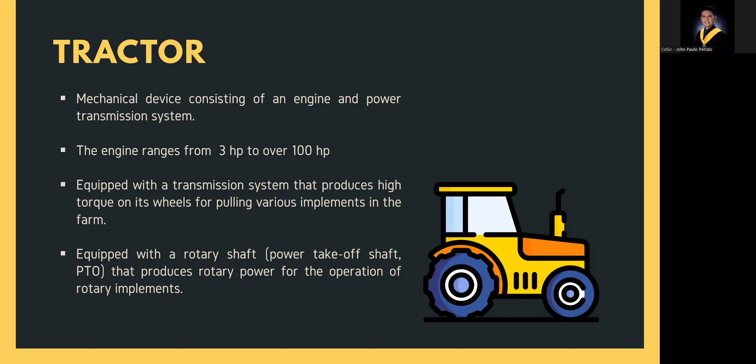It is equipped with a rotary shaft, its power take-off shaft or PTO, to produce rotary power for the operation of various rotary implements. It is also equipped with a hydraulic system for lifting and lowering during transport and positioning during operation of various implements.

Again, a tractor is defined as a self-propelled machine that has drawbar power for producing power on the wheels, rotary power on its rotating axles and shaft, and lifting power on its hydraulic system. So that is our tractor.

Tractors are classified as two-wheel tractor and four-wheel tractor. We have a two-wheel tractor and a four-wheel tractor. This is the two-wheel tractor, and this is the four-wheel tractor.

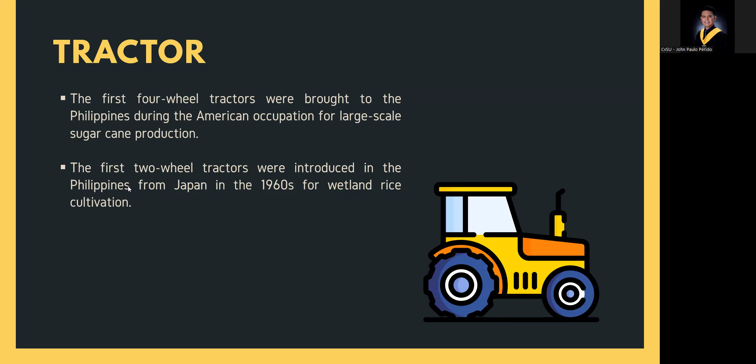So what are the basic parts of our tractor? We have the engine that supplies the power, transmission which transmits the power to the drawbar, power take-off shaft, belt pulley, and power lift. It is also a means of regulating speed. Then we have the differential, which delivers power to the transmission and to the traction wheel, and last, the clutch, which connects the crankshaft to the transmission.

Again, the clutch connects and disconnects the crankshaft, or rather the flywheel, to the transmission.

Next, types of tractor according to type of construction, and type of drive. First we have the first type and the second type according to type of construction.

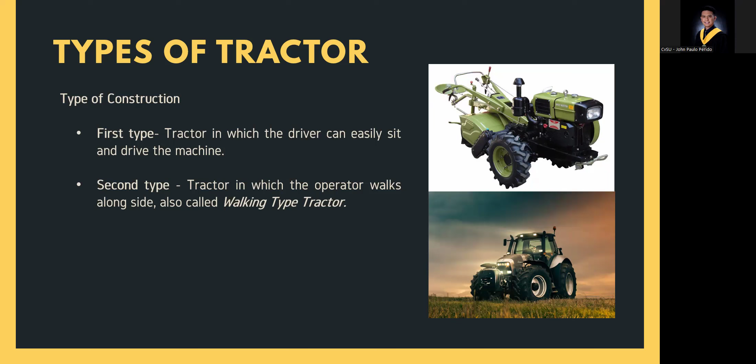The second type is a tractor in which the operator walks alongside or walks behind the tractor, or the walking type tractor. That's the one above. So this is the two-wheel tractor, also known as walking type tractor and hand tractor.

It is a single axle machine powered by an engine ranging from 3 horsepower to 15 horsepower. Where is it used? Mostly for land preparation, planting, cultivating, harvesting, and transport. Various implements are attached to this tractor and the operator walks behind to provide control.

We can also classify it according to function. We have the traction type, which provides pulling power to its drawbar; rotary type, fitted with rotary blades to cut and pulverize soil; and general purpose type, fitted with drawbar for traction work and power takeoff for rotary work.

Again, the traction type has pneumatic wheels and a drawbar for pulling. The rotary type, instead of pneumatic wheels, has rotary blades to cut and pulverize soil. And the general purpose type has pneumatic wheels for pulling and a drawbar also for pulling, plus a power take-off shaft that we can attach rotary implements to.

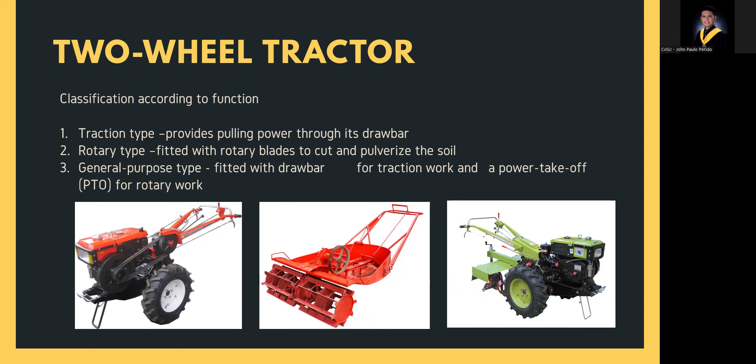The four-wheel tractor is a class of slow-moving vehicle, up to 30 kilometers per hour, with high torque on the driving wheels. It comes with multiple speed transmission, including reverse, to accommodate various field speeds.

The operator is provided with a seat from where the tractor is controlled, with various controls such as throttle lever, clutch pedal, brake pedals, gear shift lever, steering wheel, hydraulic main control lever, PTO control lever, differential lock pedals, and others. Four-wheel tractors are commonly used in land preparation, planting, weeding, cultivating, crop care, harvesting, and transport.

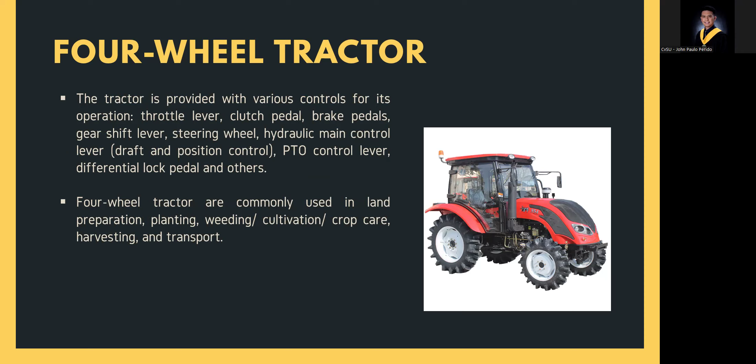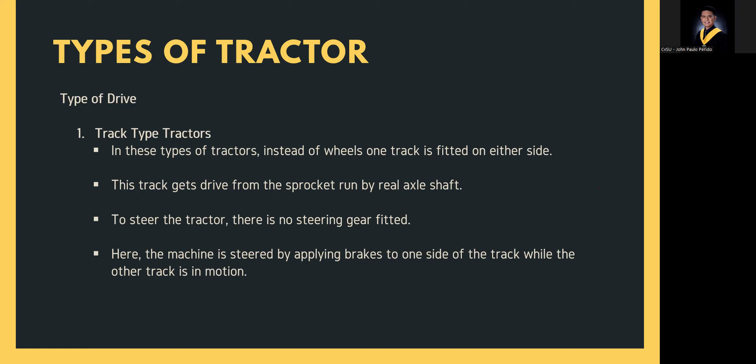Under track type, we have full track type and half track type. When we say full track type, both axles of the tractor are fitted with track chain. Sorry, that's actually half track type. For half track type, typically the rear end has track chain, and the front has pneumatic wheels. For full track type, both rear and front axle are fitted with track chain.

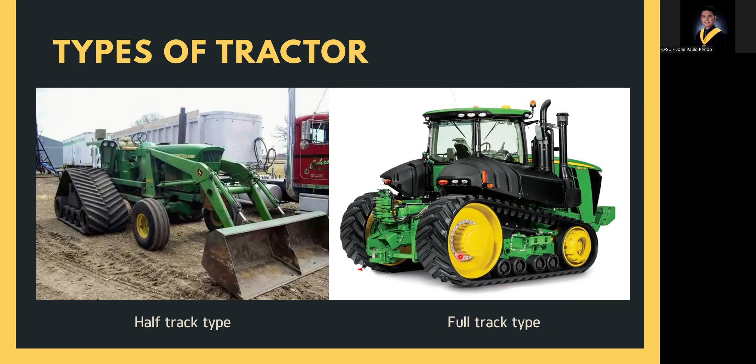We also have wheel type tractors, fitted with pneumatic wheels. And we have what's called two-wheel drive and four-wheel drive.

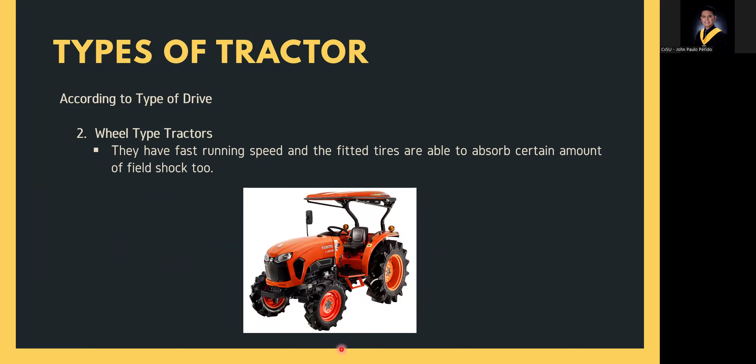Now, types of tractor according to the purpose for which the usage is done. First, utility tractor - a general purpose machine for plowing and driving other equipment through its drive. It's considered good for farms where farmers cannot afford more machines to perform a specific job.

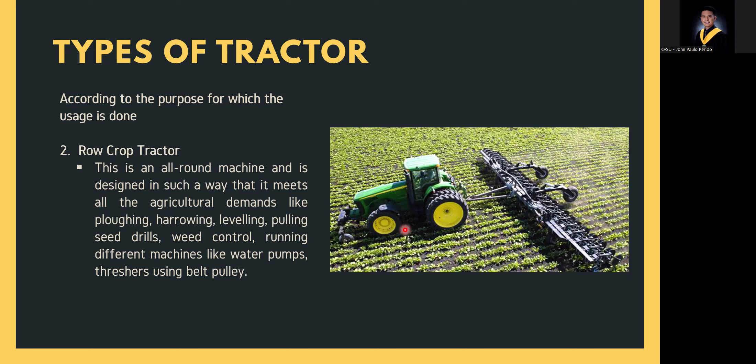Orchard type - this tractor is somewhat taller so the driver can easily pluck the fruits and the trees can be easily trimmed. It's quite tall, almost as tall as the trees.

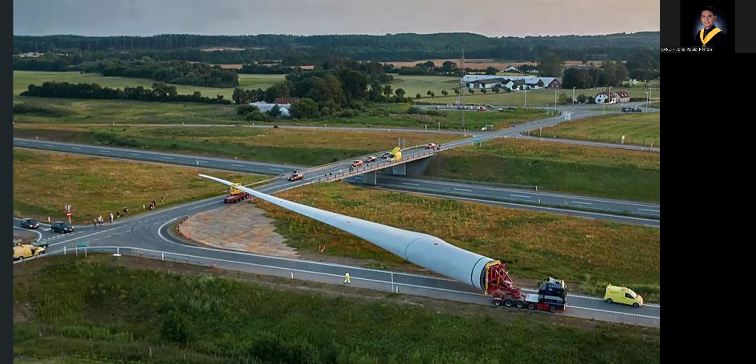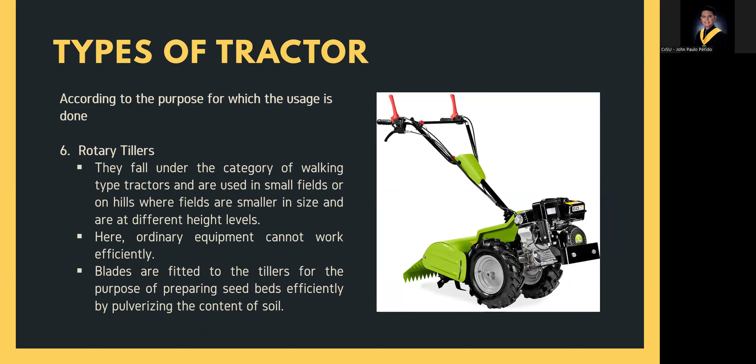Next, rotary tiller. So, under to ng mga walking type tractors and fitted to with rotary blades, pangbungkal ng lupa. Nandito yung kanyang rotary blades.

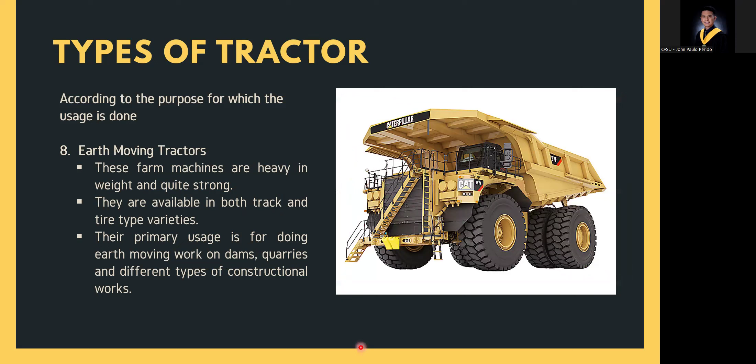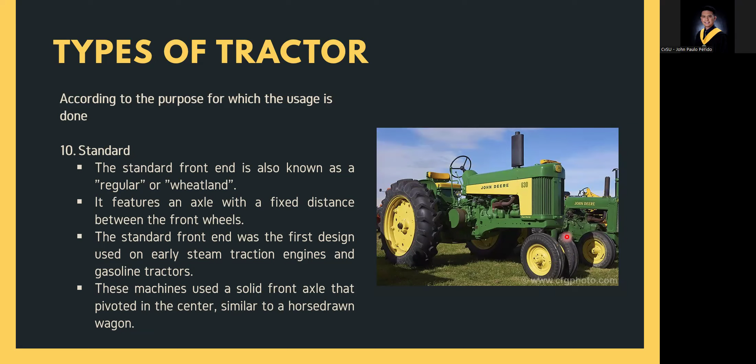Next, mga accessories naman tayo ng tractor. Una is ballast, a substance that is added to the tractor for the purpose of improving traction and stability. Para mas makapit yung tractor sa lupa and para mas stable siya, hindi siya mag-roll over.

Next is chain wheel, used to increase the traction din to. Ilalagay natin dun sa gulong. Hindi lang naman ginagamit yung chain wheel sa tractor, sa ibang bansa na maraming snow, gumagamit din ng chain wheel para to add traction at hindi ganun madulas yung kanilang mga sasakyan.

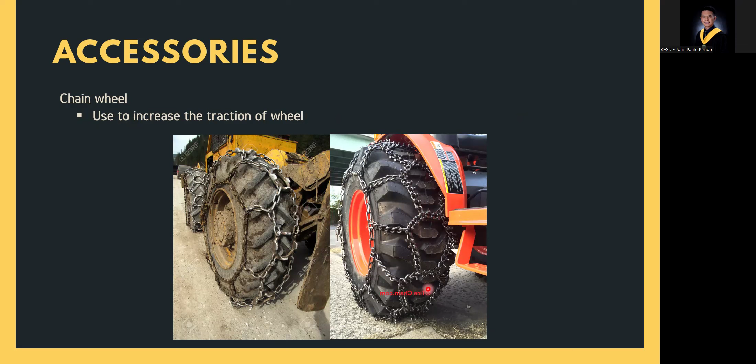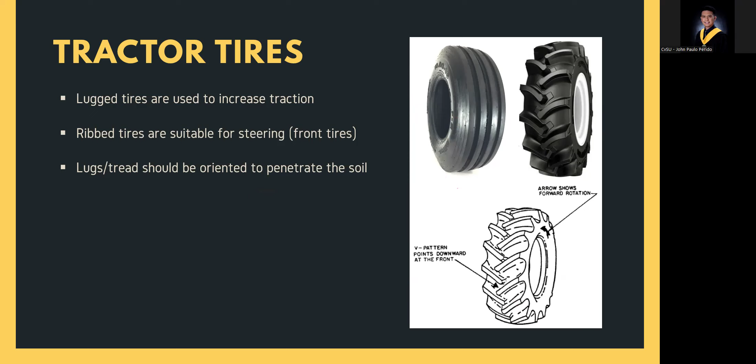Lugs/tread should be oriented to penetrate the soil. Next is dual tire, dalawahan yung gulong sa harapan, sa isang side ng axle.

Anong ginagawa nito? Dahil mas maraming gulong, mas maraming contact area dun sa soil and may permit the use of additional ballast pa. Since dumami yung gulong, mas marami yung contact area, mas na-distribute yung weight ng tractor which improves flotation sa tractor para hindi siya masyadong lumubog sa mga malalambot na lupa. Kaya lang, nag-i-increase to ng stress on tractor axle, bearing, and the entire drivetrain.

So next, transmission system naman tayo. So basic components of two-wheel tractor, we have the prime mover. So ito yung engine, power transmission system. So ito yung nagdi-deliver ng power from the engine to its wheel. Mounting frame kung saan nakalagay yung iba't ibang parts ng tractor. Differential control lever, different control levers, and wheel.

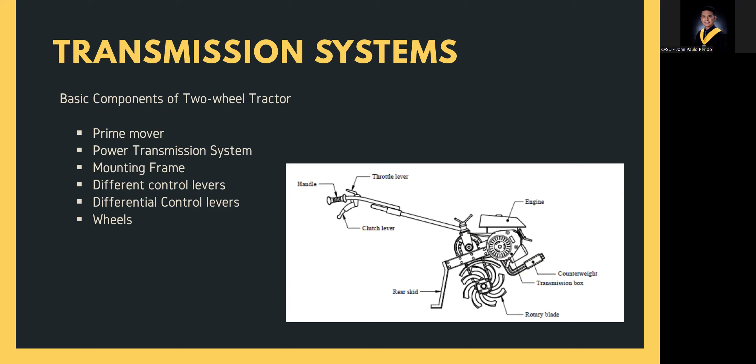So, common methods of power transmission for two-wheel tractor. So, una is belt and pulley. So, transmission efficiency ng belt ay less than 100% because some slippage between belt and pulley happen. So, transmission efficiency is a function of belt tightness, diameter, class of pulley, type of belt, and magnitude of power being transmitted. So, ito makikita natin sa taas. Ito ay V-belt and V-pulley or V-belt and sheave. Tapos ito naman, flat belt pulley and flat belt.

Okay? So, the direction of rotation of two pulleys are the same. Okay? So, kung yung driver pulley is counterclockwise and then yung driven pulley, counterclockwise din. So, clutch action may be obtained by shifting the belt from a loose to a tight connection using third pulley or other techniques.

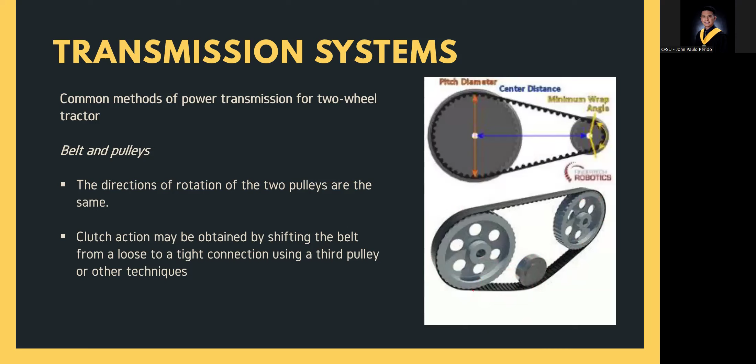So speed ratio between the engine and the load depend on the diameter of two pulleys as shown in the equation. So ito yung ating formula. N1 D1 is equal to N2 D2, where N1 is the RPM of the smaller pulley, N2 is the RPM of the larger pulley, D1 is the diameter of the smaller pulley, and D2 is the diameter of the larger pulley. Next, for the belt length naman, so this is from PAES.

So, L is equal to 2C plus pi over 2 times DL plus DS plus the quantity DL minus DS quantity squared all over 4C. So, where L is the length of the belt in mm, C is center to center distance ng mga pulley, D sub L is yung diameter ng larger pulley, and D sub S is diameter of the smaller pulley.

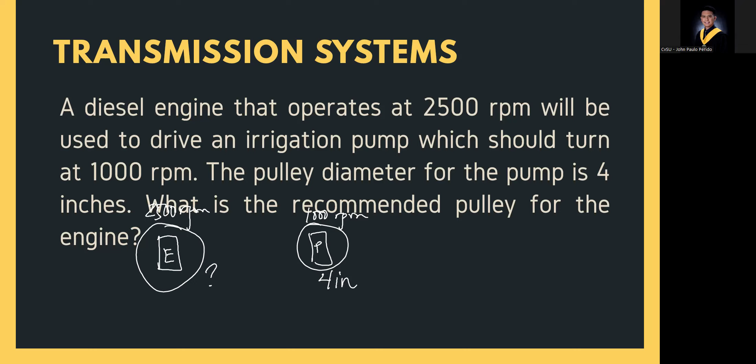So, sabi doon sa equation natin, N1 D1 is equal to N2 D2. Okay? So, N1 is speed, so 2500 RPM. Diameter 1 is missing, and N2 naman is yung speed ng mas maliit nating pulley times diameter, 4 inches.

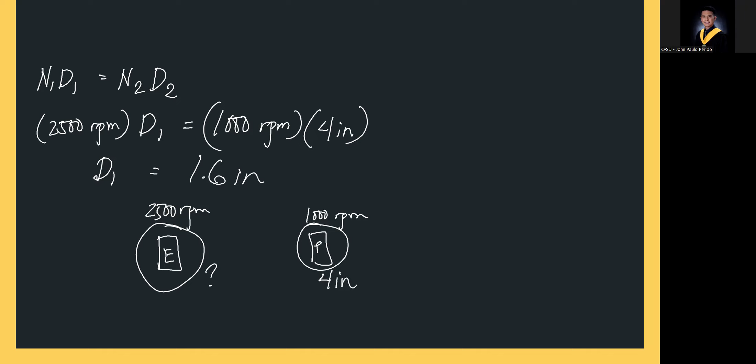So, pag kinompute natin yung D1, so ang sagot dito is 1.6 inches. So, mas maliit yung pulley ni engine kaysa kay pump. Okay? So, maliit na pulley, papuntang palaking pulley. So, magdi-decrease yung speed. Okay?

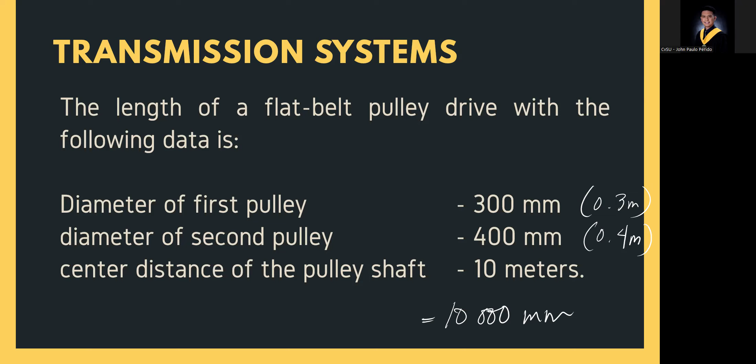Okay. So, next, length of flat belt naman ang pinapahanap with the following data. So, the diameter of the first pulley is 300 mm. Diameter of the second pulley is 400 mm. And the center-to-center distance of the pulley shaft is 10 meters. So, times 1,000, magiging 10,000 mm. Okay? Or, pwede rin naman natin itong gawing 0.3 meters. Ito naman, 0.4 meters. So, kahit alin dyan yung gamitin natin.

Okay? So, sabi, L is equal to 2C plus pi over 2, D na malaki plus D na maliit, plus D na malaki minus D na maliit squared over 4C. Okay? So, L is equal to 2 times, gawin na lang natin meters, 10 meters plus pi over 2. Ang D na malaki natin is 0.4. Plus pala to. So, plus 0.3 meters.

Naka-meters pala to. 0.4 meter plus 0.3 meter plus 0.4 meter minus 0.3 meter squared over 4 times 10 meters. Okay? So, pag kinumpute natin ang L dyan, magiging sagot natin is 21.09980743 meters. So, yan yung length ng flat belt na kailangan natin. Okay?

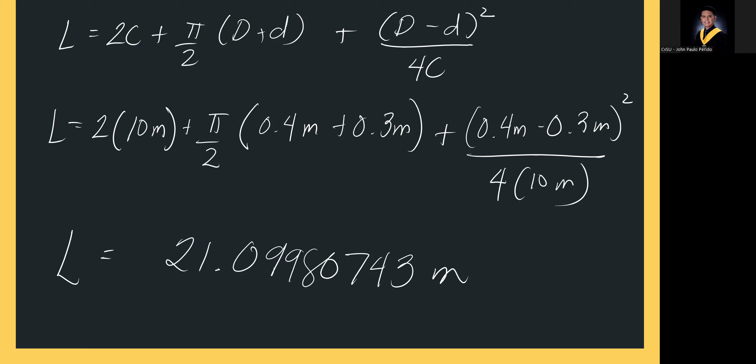Next. So, another transmission system is chain and sprocket. So, less than 100% din ang efficiency nito because of chain slack. So, ang direction nito is the same. Okay? So, kung clockwise yung isang sprocket, clockwise din yung isang sprocket. So, common example of using chain and sprockets are the transmission of bicycles and motors.

So, yung speed ratio between the engine and load depends upon the number of teeth ratio of the two sprockets. So, ito yung equation nila. N1T1 is equal to N2T2. So, similar lang to sa equation kanina na N1D1 is equal to N2D2. Kaya lang, sa halip na diameter, number of teeth nung sprocket naman yung kailangan natin.

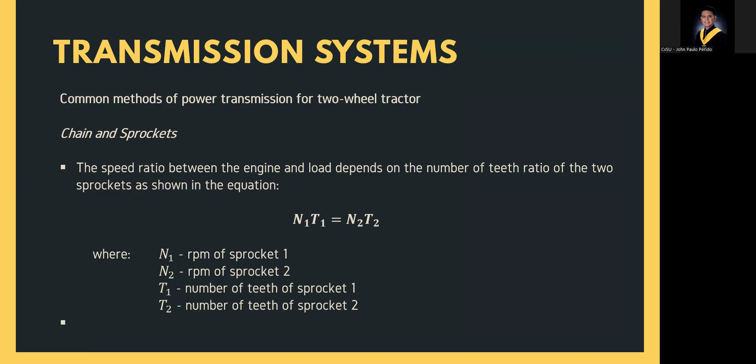And then, ito naman yung length of chain. L is equal to 2C plus (T sub L plus T sub S) over 2 plus (T sub L minus T sub S) squared over 4 pi squared C. Wherein T sub L is the number of teeth of large sprocket and T sub S number of teeth of small sprocket. C naman is center distance between shaft in pitches. And then, length of chain is in pitches. So, speed ratio of chain is driver over driven sprocket. So, para makuha natin ang speed ratio.

So, a chain and sprocket drive is designed to drive a horizontal mixer at a speed of 100 RPM. The power source from a smaller sprocket has a speed of 400 RPM. So what is the size of the smallest sprocket needed if the large sprocket has a teeth of 45 T? Also compute for the speed ratio of the drive and the length of the chain if the center distance between shaft is 48 inches. Assume a chain pitch of 0.5 inch per pitch. Okay, sagutan natin yan.

So, unahin muna natin yung number of teeth. So, tingnan natin sino magka-partner dito. So, chain and sprocket daw ginamit to drive a horizontal mixer. So, si mixer, 100 ang RPM niya. Yung power source, 400 RPM. And what is the size if the large sprocket has a teeth of 45 T. So, si 400 RPM, smaller sprocket siya. Ibig sabihin ang magka-partner is itong 45 tsaka itong 100. Okay? So, kumpyutin na natin yan.

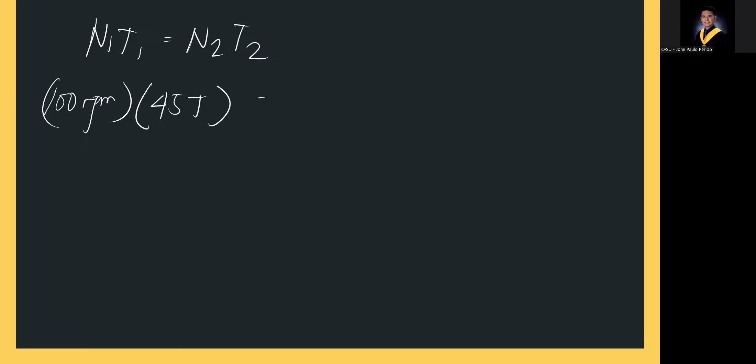So, sabi, N1 T1 is equal to N2 T2. So, ang speed N1 is 100 RPM. Ang number of teeth naman niya is 45 T. Sa N2 naman, ang speed niya is 400 RPM, pero hindi natin alam kung ilan yung number of teeth niya. So, pag kinuha natin ang number of teeth nito, ang lalabas ay 11.25 T or 11.25 teeth.

So, the problem is wala tayong 0.25 teeth. So, hindi pwedeng bungi. Okay? So, either magiging sagot natin is 11T or 12T. Kaya lang, isa lang pipiliin natin. So, i-check natin if 11T ang gamitin natin at 12T. So, let's say N1 yung missing, times 45T, equals 400 times 11T, tapos another is N1 times 45T is equal to 400 times 12T. So, tingnan natin ano yung magiging value ni N1 if ginamit natin itong dalawang to.

So, 400 times 11 divided by 45, ang lalabas ay 97.77 RPM. Okay? Pagka naman 12, 400 times 12 divided by 45, ang lalabas ay 106.67 RPM. So, ang gagamitin natin dyan is 12T. Bakit si 12T? Kasi lampas siya ng 100 RPM. Need kasi natin ma-provide yung 100 RPM. Kung mag-11T tayo, hindi natin mapoprovide yung 100 RPM, 97 lang. So, much better if 12T yung gamitin natin para ma-provide pa rin natin.

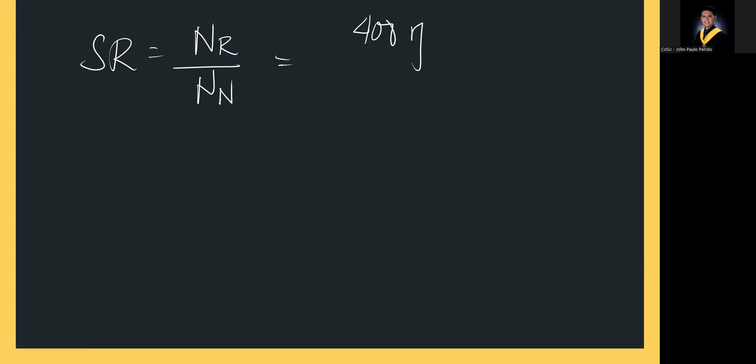So, used to drive a horizontal mixer. So, ibig sabihin, sa horizontal mixer yung dinadrive, 100 yung RPM niya. Okay? And then, siya yung driven gear. Siya yung dinadrive eh. So, ito yung driven gear. At ang driver naman natin ay etong 400 RPM. So, driver is 400, driven naman is yung 100. So, ito R para driver, ito driven naman. Para matandaan natin, R tsaka N.

Dulo ng driver na word. So, driver, ito yon. Driven naman to. Para hindi tayo malito. Palatandaan yan. So, 400 over 100 RPM. So, magiging sagot natin dito is 4 is to 1. So, bakit may is to 1? Kasi speed ratio. Okay? Next naman is length of chain.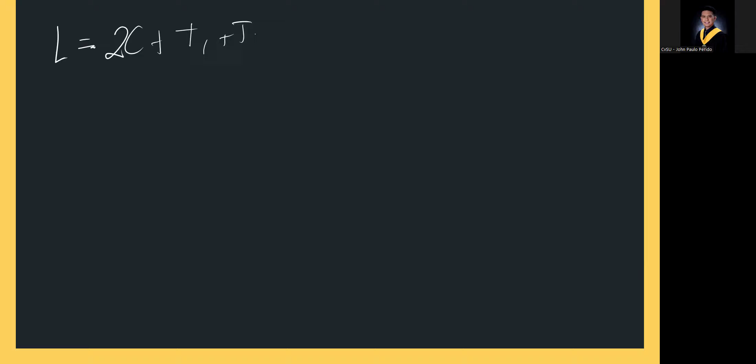Center distance is 48 inches, 0.5 inch per pitch. So, sabi sa equation kanina, L is equal to 2C plus TL plus TS all over 2 plus (TL minus TS) squared over 4 pi squared C. And C is in pitches. Okay? So, L is equal to 2 times 48 inch times 1 pitch per 0.5 inch. Okay?

Plus 45T plus 12T over 2. So, ito yung mga nakuha nating value, plus 45T minus 12T squared over 4 pi squared times 48 inch times 1 pitch per 0.5 inch. So, solving for L, ang makukuha natin is 220.5087073 pitches. Okay? And pwede natin to i-convert into inches.

So, 220.5087073 pitches times 0.5 inch per pitch. So, makuha nating answer dito is 110.2543536 inch. Okay?

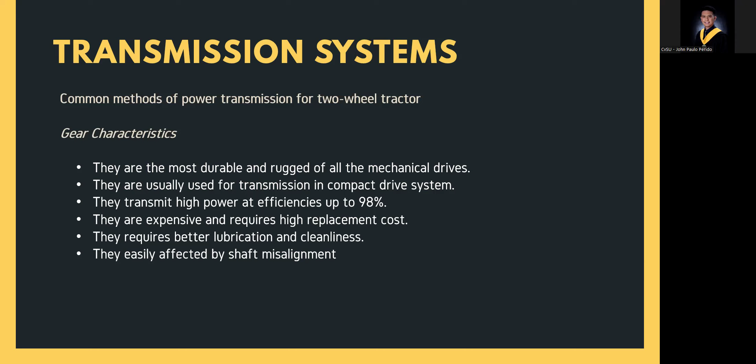So, transmission efficiency is less than 100% because of gear slack. And yung center distance between shaft of the engine and load is dictated by the size of the gear. So, okay lang dito na maliliit yung center to center distance. So, ano ba yung characteristic ng gear? Durable and rugged for all mechanical drives. They are usually used for transmission in compact drive system. Up to 98% ang efficiency niya. Expensive and requires high replacement cost. Requires better lubrication and cleanliness, and easily affected by shaft misalignment.

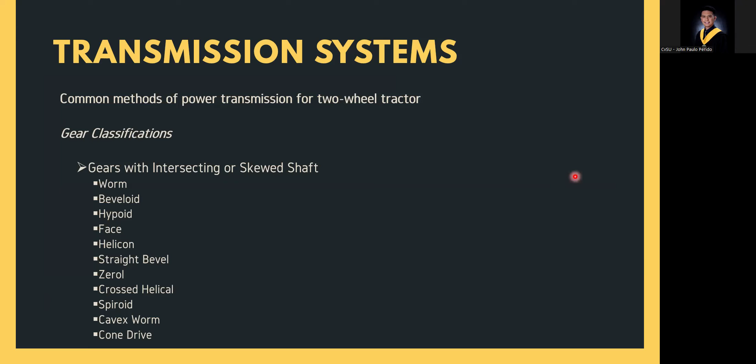So, yung mga gears with intersecting or skewed shaft naman, we have the worm, beveled, beveloid, hypoid, face, helicon, straight bevel, zerol, crossed helical, spiroid, cavex worm, and cone drive. So, ito yung straight bevel gear. 90 degrees yung angle nung mga axis nung kanilang shafting. Ito naman, worm gear naman to. Hindi intersecting yung shaft niya, pero pwede na natin sabihin intersecting yung shaft niya at some point.

So, spur gear. Tingnan natin yung ilang mga gears lang. Spur gear, most common type ng gear to. Teeth are straight and parallel to shaft axis. Simple lang to, low cost, and easy to maintain. Drawbacks lang nito, less capacity and noisier than other types of gear. So, helical gear, para pa rin siyang spur gear, pero yung mga ngipin niya ay tabingi na. It can carry more load than the equivalent size of spur gear. Mas smooth yung operation and mas quiet. Kaya lang medyo costly siya as compared to spur gear. And kapag double helical gear, we call it a herringbone. So, ito yung herringbone natin.

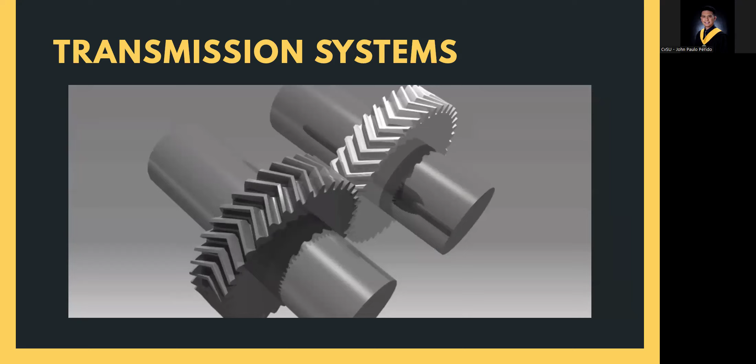So, straight bevel gear naman, simplest type ng gears with intersecting shaft. It is commonly used for shafts intersecting at right angle but can also be used for shafts mating at any angle. So, pag sinabi natin straight bevel gear, 90 degrees. Pero pagka bevel gear lang, pwedeng hindi 90 degrees yung shafting. Gears are designed in pairs that are not always interchangeable. Supporting shaft and bearings must be rigid to maintain proper tooth contact.

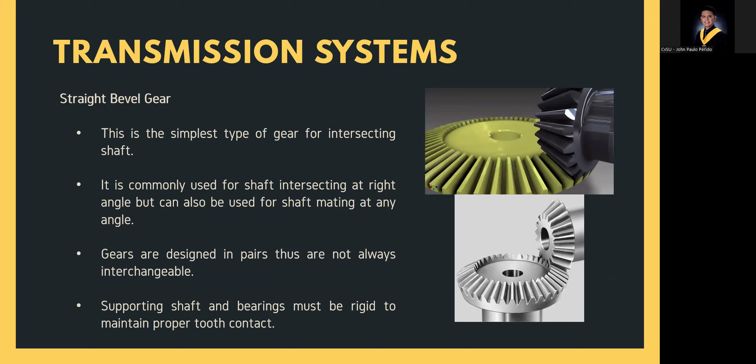Okay, next. So we have here a rack and pinion gear. So from rotational to linear naman yung motion nito. And then, ito naman yun kapag gumamit tayo ng idler gear. So tingnan natin. So pag kasi gear, opposite yung direction. So balikan natin yung mga nakarang gear.

So tingnan natin to. So si red ay let's say this is clockwise. Si blue naman counterclockwise. So tingnan natin dito. Etong mas malaki, clockwise. Yung mas maliit, counterclockwise. So, ganyan kapag ang direction, kapag ka-gears. Pero pag nilagyan natin ng third gear or the idler gear, si A tsaka si C, same na yung direction niya. While si B naman is opposite ni A at opposite din naman siya ni C.

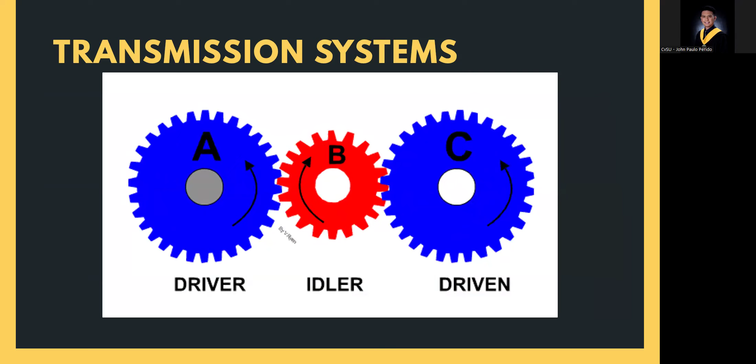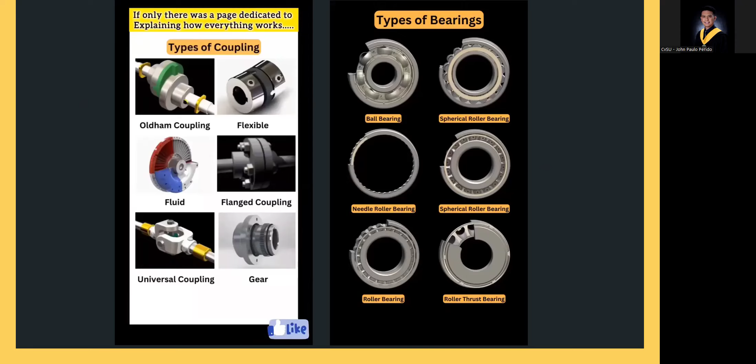So, next naman, ito naman mga to ay mga couplings. So, kung mababasa nyo yung ENGMAT, which is, I think, i-quiz din naman natin yan. Hindi po pala. So, hindi pala natin i-quiz yung PAES ng ENGMAT. So, kung mababasa yung ENGMAT sa mga journals, coupling. So, we have the Oldham, flexible, fluid, flange coupling, universal coupling, and gear. And then we have the types of bearings here. So, mga ball bearing, spherical roller bearing, needle bearing, spherical roller bearing again, roller bearing, and roller thrust bearing.

So, try natin mag-compute. So, a gear rotating at 800 RPM, it is being driven by another gear at 400. What is the speed ratio of the drive? And what is the gear ratio? So, hindi natin alam ang speed ratio. Kasi ang speed ratio is for... okay. So, speed ratio, same pala siya. Gear ratio ang hindi natin alam, no? Ang walang formula. So, speed ratio is equal to driver over driven.

Okay? So, from here, gear rotating at 800. So, it is being driven by another gear at 400. Ibig sabihin, ito yung driver, ito yung driven. So, kung kumpitin natin speed ratio, ang driver natin is 400 at ang driven natin is 800 RPM. Pag kinumpute natin yan, 0.5:1. So, yan yung speed ratio.

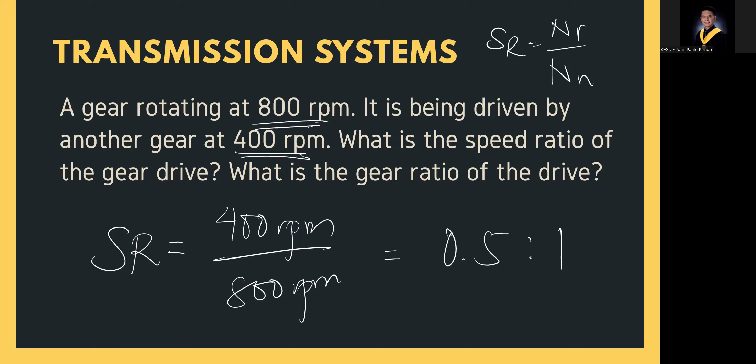Pag sinabi naman natin gear ratio, so number of teeth of the driven gear and number of teeth of the driver gear. Okay? So, kaya lang, ang problema, hindi sinabi sa problem kung gaano kadaming teeth. Okay? So, but we can assume naman, since naka-ratio to, no? So, gamitin natin N1T1 is equal to N2T2.

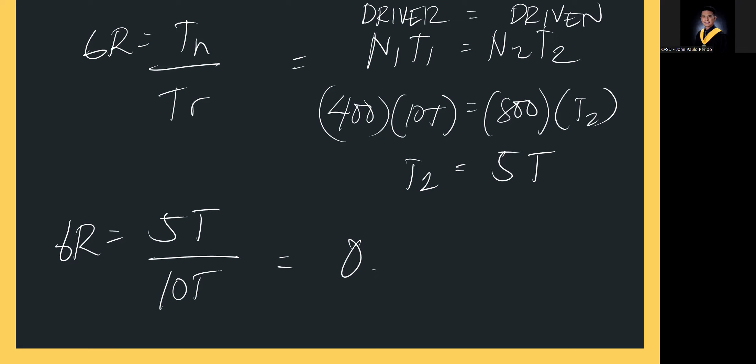So, kung si N1 ay sabihin natin itong 400, sabihin natin 10 lang yung teeth nito, si N2 ay 800. So, ilan kaya ang teeth nito? Okay? So, pag kinumpute natin, so 5T lang. Okay? So, sino ba dito si driver? So, dito sabi kanina, ang driver is si 400. Ito si driver. Ito naman si driven. Okay? So, from the gear ratio, so we have number of teeth of the driven, which is 5, over number of teeth of the driver, which is 10. So, ang lalabas sa atin ay 0.5:1 pa rin. Okay?

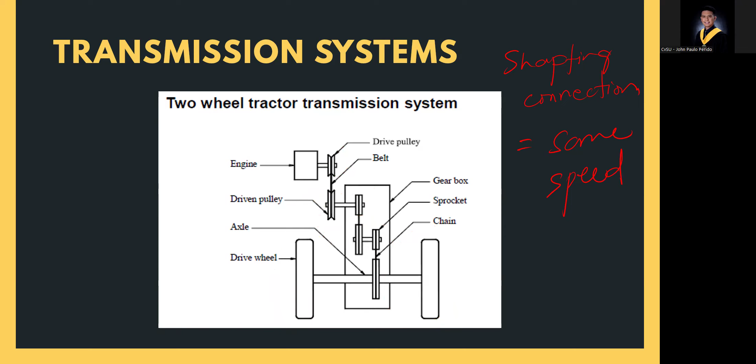Okay, so the transmission system is the second major component of the tractor, sa four-wheel. The engine being the first major component. So again, the transmission system provides drawbar power through the wheels, rotary power through rotary axles and shaft, and lifting power sa mga hydraulic system. So, drawbar power sa mga wheels, PTO shaft, so rotary power, and hydraulic power sa mga hydraulic system.

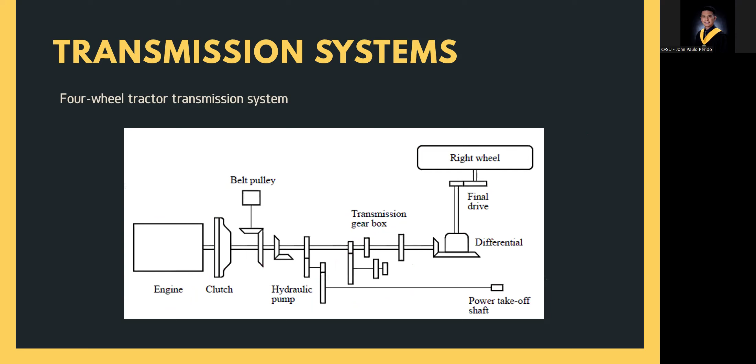Okay? So, kung natatandaan yung powertrain dun sa discussion natin sa engine, ito din yan. So, clutch, which connects and disconnects the engine flywheel. And then, naka-belt and pulley siya. May pump to the hydraulic system. And then, power PTO. And then, also the transmission gearbox. And then, from that, papuntang differential. And then, differential, papuntang left and right axle ng rear wheel niya.

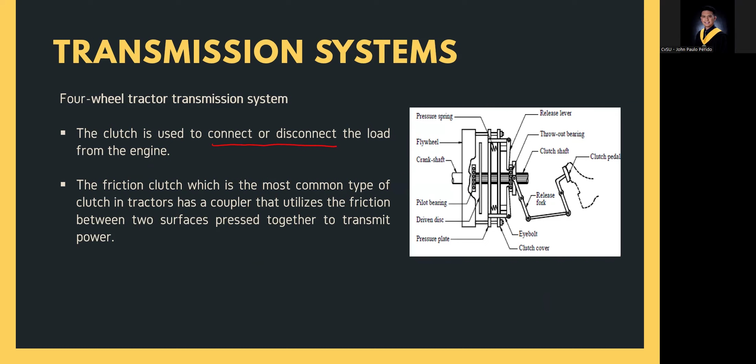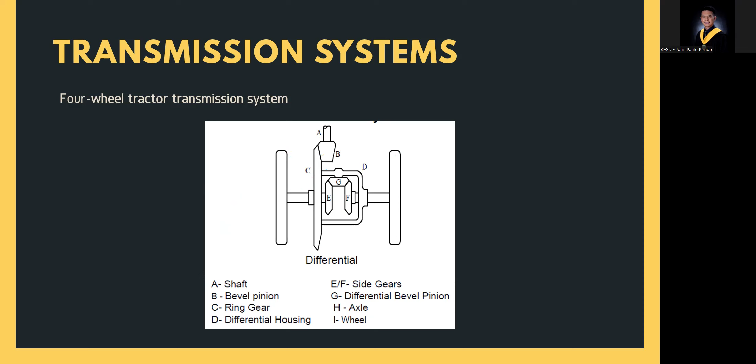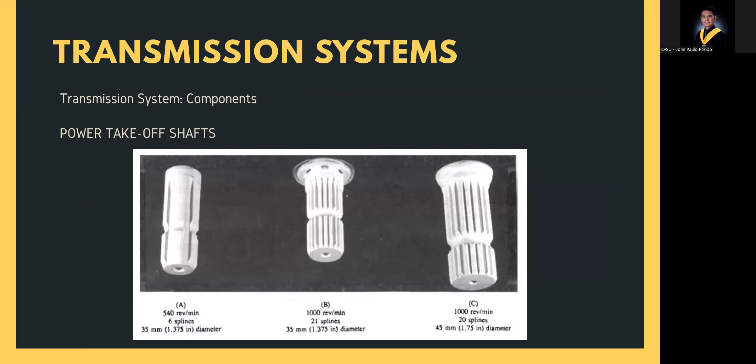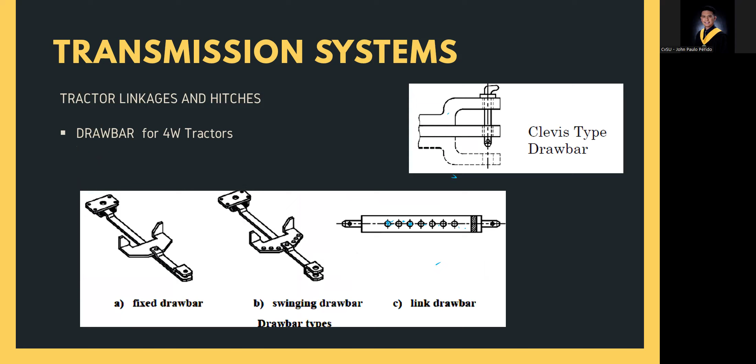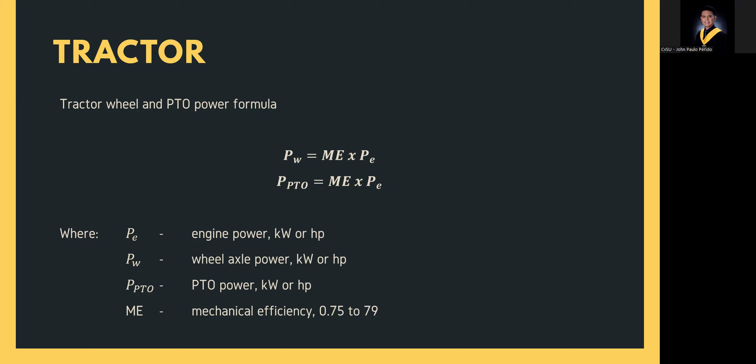So what is the wheel axle power of a four-wheel tractor whose engine power is equal to 150 HP? So mechanical efficiency is 79%. So dito, hinahanap yung wheel axle power. So paano natin kukumputin yun?

So, wheel axle power is equal to mechanical efficiency times engine power. So PW is equal to 0.79 times 150 HP. So the answer is 118.5 HP.

Next, wheel axle torque is equal to 60 times wheel power over 2 pi n, where n is the speed of the wheel axle in RPM. Or torque can be equal to force times radius of the wheel.

So compute the wheel axle power of the tractor. The computed wheel axle power of the tractor is 127.5 HP. What is the wheel axle torque of the tractor if its wheels rotate at 40 RPM?

So let's plug this into the equation. But we need the wheel axle power in kilowatts, and what's given is in HP, so we use the 0.7457 conversion factor. Also, if the tractor has a wheel diameter of 2 meters, what is the force available at the wheel of the tractor?

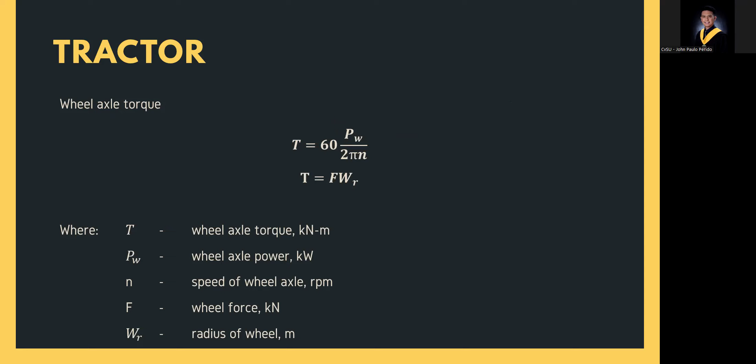22,697.90211 Newton meter. So next, to compute the force, which uses torque is equal to force times wheel radius. So we have torque equal to 22,697.90211 Newton meter, and we need to find the force.

And the wheel radius, since the diameter is 2 meters, our wheel radius is 1 meter. So therefore, force is equal to 22,697.90211 Newton. Next, tractor speed.

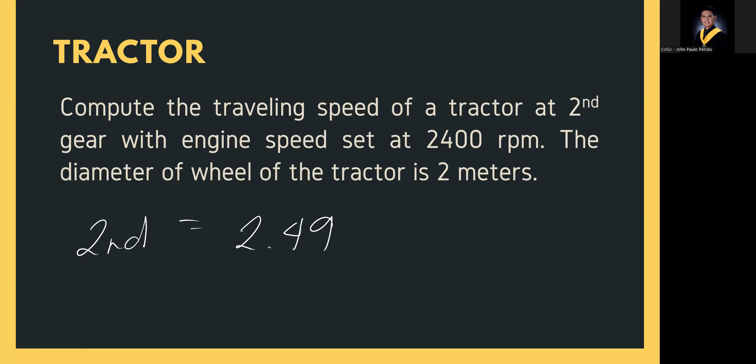So, compute the traveling speed of the tractor at second gear. At second gear, the reduction ratio is 2.49, engine speed is 2400 RPM, and diameter of the wheel is 2 meters. So we need the diameter, engine speed, and reduction ratio.

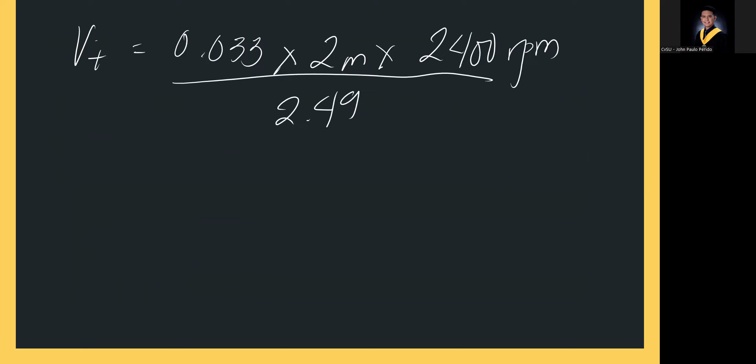So let's compute. V sub T is equal to 0.033 times diameter of the wheel, which is 2 meters, times engine speed, 2400 RPM, over reduction ratio I, which is 2.49. So V sub T is equal to 63.6145 kilometer per hour. So next is inflation pressure.

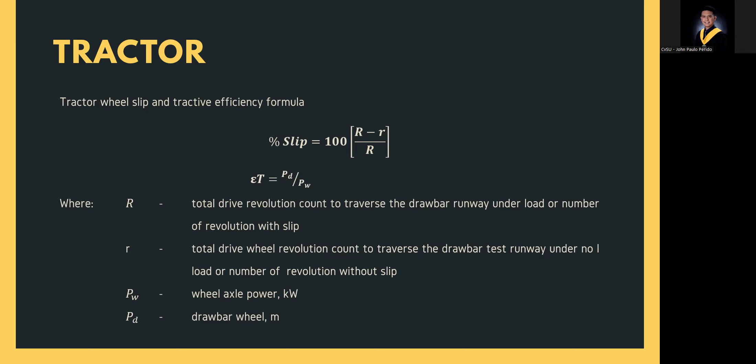So next is wheel slip. Tractor wheel slip and tractive efficiency. Formula: percent wheel slip is equal to 100 times R major minus R minor over R major. R major is the total drive revolution count to traverse the drawbar runway under load, or number of revolutions with slip. R minor is the total drive revolution count to traverse the drawbar test runway under no load, or number of revolutions without slip. Or it can be drawbar power over wheel axle power, E sub T.

So let's try this one. The wheel slip test of a tractor had shown that the wheel rotates by 3.5 revolutions at a distance of 20 meters. So, imagine this is the wheel of the tractor - in 20 meters, it makes 3.5 revolutions. If the tractor wheel has a diameter of 2 meters, what is the percentage slip of the tractor?

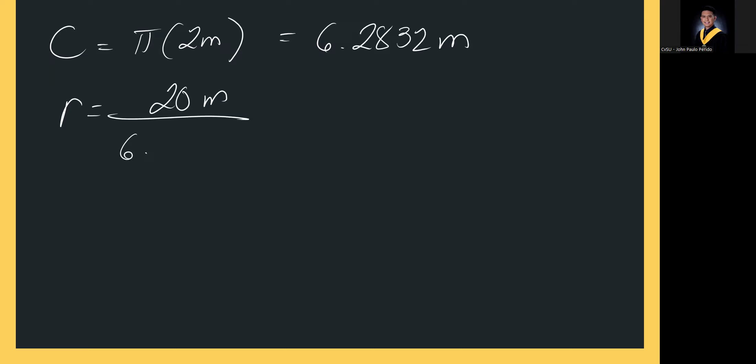So first, the circumference is equal to pi d, so pi times 2 meters. The circumference is equal to 6.2832 meters. Then for R minor, without slip, meaning over 20 meters, when we divide by 6.2832 meters, we get 3.183098862 revolutions. So within just 3.18 revolutions, the 20 meters would be covered.

But due to wheel slip, it made 3.5 revolutions. So to compute the percent slip: 100 multiplied by the with-slip value, 3.5, minus the without-slip value, 3.18, over the with-slip value again. So we get the percent slip equal to 9.054318233%.

Power take-off shaft. PTO or power take-off shaft is used to drive field machines such as rotary plow, hay baler, corn picker, self-unloading forage wagon, or irrigation pump. So ito yung PTO shaft, napakita ko yan sa inyo kanina. 540 and 1,000 yung RPM niya.

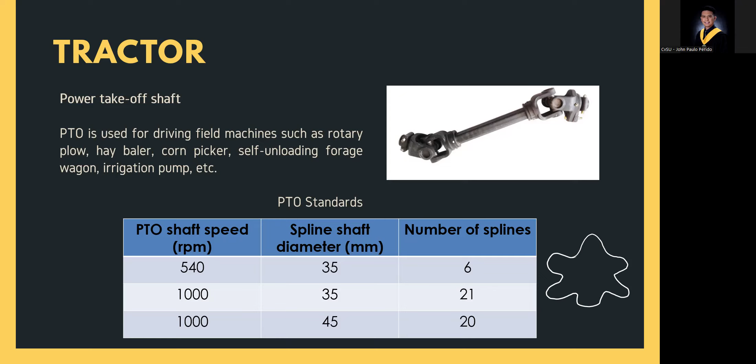It can be 35 or 45 in diameter and 6, 21, or 20 number of spline. Ano yung ibig sabihin natin yung spline? Ganito kasi ang itsura. Oh mali pala, 5 spline lang pala to. So medyo ganito yung itsura ng spline, para siyang gear, pero imagine mas circular siya. So yan yung cross-section nitong tawag dito, PTO.

Next, tractor size can be determined based on the following. Pag sinabi nating tractor size, hindi yan dimension ng tractor. Hindi yan, pag tinanong what is the size of the tractor, hindi ko dapat marinig na ang sasagot nyo 6 meters by 2 meters, mali yan. Pag sinabi nating tractor size, it can be in terms of weight. The heavier the tractor, the bigger its capacity. Or mas madalas, in terms of horsepower. Higher tractor horsepower, the bigger its size and be capable to do wider operations. So ano ba, pag tinanong, what is the size of the tractor?

Let's say kunwari yung tractor natin sa DAFE. The size of the tractor, nung Kubota tractor natin sa DAFE, is 40 HP. Okay? So ganun ang tractor size. Or in terms of implement capacity, the more the tractor can draw implement, the bigger its size and the faster it can finish the operation.

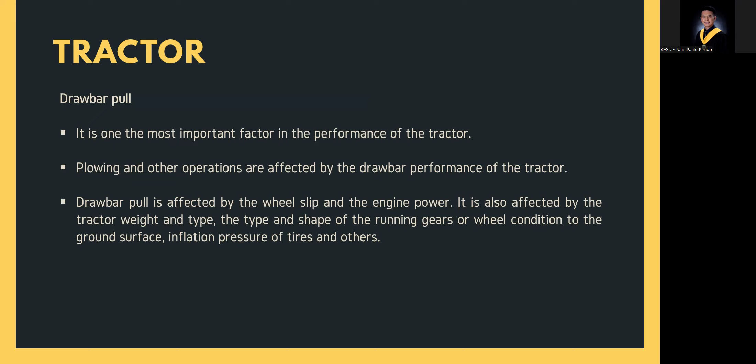Next, drawbar pull. It is one of the most important factors in the performance of the tractor. Plowing and other operations are affected by the drawbar performance of the tractor. Drawbar pull is affected by the wheel slip, the engine power. It is also affected by the tractor weight and type and shape of the running gears or wheel condition to the ground surface, inflation pressure of tires, and others.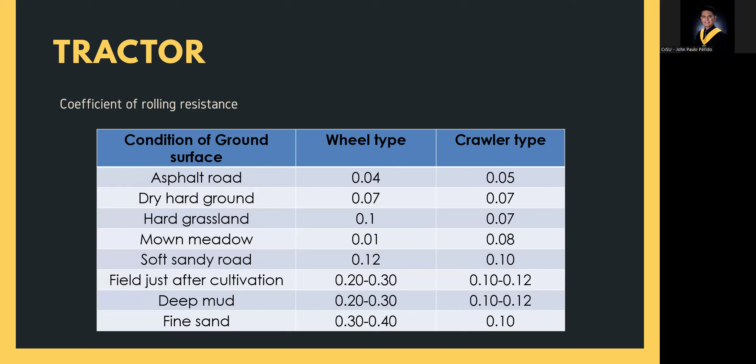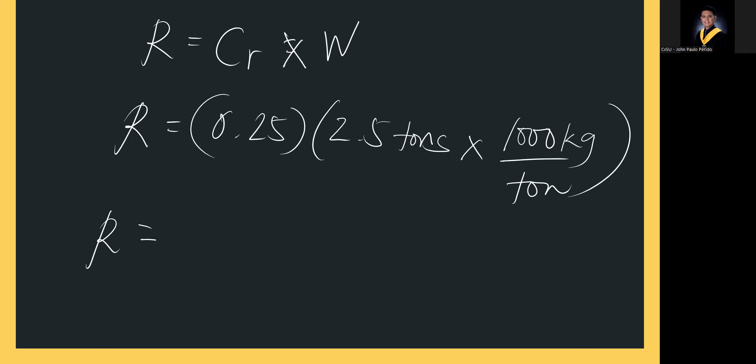A four-wheel tractor weighs 2.5 tons and running on a deep mud soil during rotary tilling operation. What is the rolling resistance of the tractor? Sa deep mud soil, ang resistance niya, wheel type, 0.2 to 0.3. Kunin natin yung average, 0.25. Sabi, rolling resistance is equal to CR times W. So rolling resistance is equal to 0.25 times weight of the tractor in tons. Convert na lang natin na 1,000 kg per ton. So sagot natin for the rolling resistance is 625 kilograms.

Next, drawbar power formula. Drawbar power is equal to wheel axle power minus power loss. At yung power loss na yon is due to wheel slip and rolling resistance. So power loss is sum ng wheel slip at rolling resistance. If the tractor has a wheel axle power of 127.5 HP, a wheel slip of 27.39%, and a rolling resistance of 625 kilograms, and runs at a speed of 15 kph, what is the power loss and the drawbar power that can be delivered by the tractor?

Again, power loss is equal to the sum of wheel slip plus yung rolling resistance. Wheel slip muna, kunin natin, PS is equal to yung wheel slip times axle power. So kunin natin yon. PS is equal to 127.5 HP times 0.2739 ng wheel slip natin. So this is 34.92225 HP.

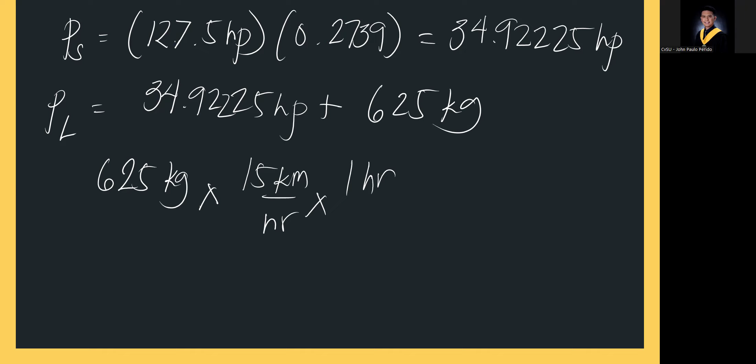Next naman, yung power loss is equal to sum nito, plus yung rolling resistance natin. So it was mentioned na 625 kg. But the problem is, naka-HP yung isa, naka-kilogram yung isa, no? So convert muna natin. 625 kg times, given naman yung speed niya na 15 kilometers per hour times 1 hour, gawin nating seconds para magkaroon tayo ng kilogram meter per second. Tapos ang 1 km is 1,000 meter times 9.806 pa.

Kailangan pa natin itong i-multiply by 745.7 watts, convert natin to 1 HP per 745.7 watts. So lalabas dito is 34.244449882 HP.

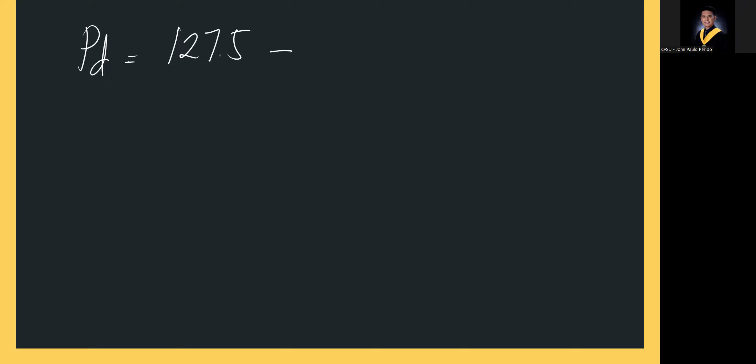Ang power loss natin is sum nitong 34.92225 HP tsaka itong 34.244449882 HP. So ang total power loss natin is 69.1672382 HP. So last, ang hinahanap na lang natin is yung drawbar power, which is equal to 127.5 minus yung total loss natin na 69.1672382 HP. So PD is equal to 58.3327618 HP. So imagine, mas malaki pa yung power loss kaysa dun sa drawbar power.

Okay, next, linear velocity. So to convert the linear velocity, yung velocity ng mga wheels natin from the number of revolution, kailangan lang natin itong simple formula na to: V is equal to pi D N, where V is the linear velocity, D is the diameter of the wheel, and N is the number of revolution.

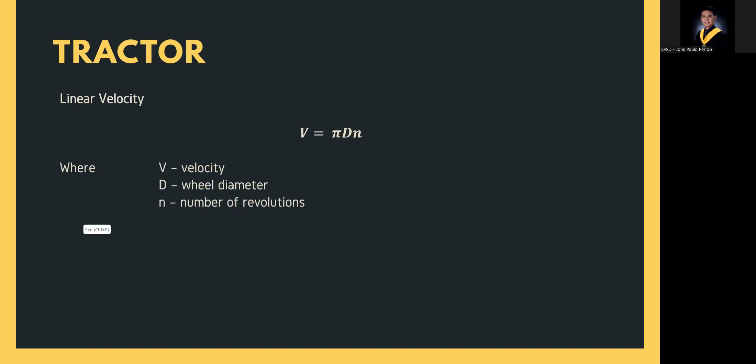Kailangan din natin itong mga reduction formula nito: N1D1 is equal to N2D2, saka N1T1 is equal to N2T2. So let's try this problem.

Determine the forward speed of a two-wheel tractor in kph if specification of the transmission devices are given as below. Sa first reduction, 3,000 RPM, at pinapaikot niya yung D1 na 10 cm, connected siya sa D2 na 30 cm at hindi given yung N2. Second reduction, N3 siya, at N4 is equal to 250. T3 is equal to, walang naka-equal dito, at T4 is 100 T.

Kanina, sa first reduction, naka-pulley. Second reduction naman naka-gear. At third reduction, N5 wala nakalagay, N6 is 75 RPM, at T5 is 33 T. T6 wala nakalagay, N7 wala nakalagay, D7 is 50 cm, yan ang diameter ng wheel. At speed in kph, yan ang pinapahanap.

Paano natin gagawin ito? Gagawin natin ganito: ito yung first reduction, connected ng shafting, second reduction to, connected ulit to by shaft, and then third reduction, connected by a shaft. Ito na yung ating ground wheel - first, second reduction, and then third reduction. Lalagyan natin yan.

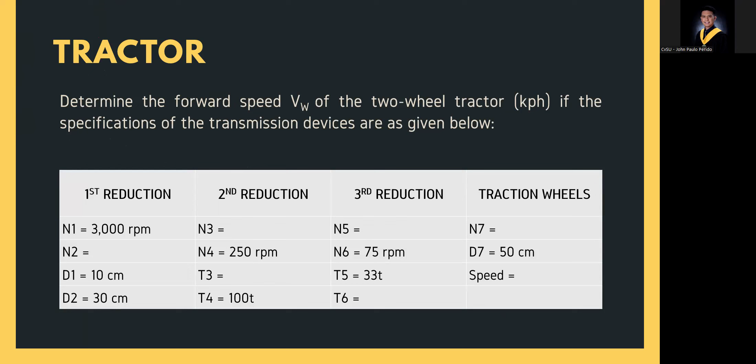Okay, pag binalikan natin yung problem: 3,000 RPM, D1 is 10 cm, D2 is 30 cm. N3 wala, N4 is 250 RPM, T4 is 100 T. N5 wala, N6 is 75 RPM, T6 ay wala. N7, D7 is 50 cm.

Ang kailangan lang naman natin dyan talaga is etong part na to, kasi gagamitin natin yung V is equal to pi D N. So V, at pi, meron na tayo. Ang D, ito yon si D7. At yung N, N7 yung kailangan natin. So kailangan lang natin itong N7.

Kung titingnan natin, si N7 is connected kay N6 via shaft. At pag sinabi natin via shaft, same sila ng speed, ibig sabihin N7 and N6 are equal. Therefore N7 is equal to 75 RPM also. Ayan, kumpleto na tayo. Yun na lang muna yung gagawin natin. Hindi na natin kailangan pakialaman yung mga missing dun sa first, second, and third reduction, kasi nakuha na natin si N7, which is yan yung crucial na kailangan natin for determining the forward linear speed.

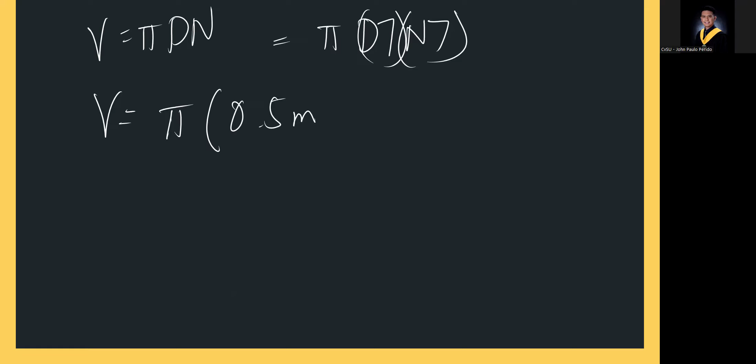So balik tayo: V is equal to pi D N or pi D7 N7. Ang D7 natin gawin natin ng meters, so 0.5 meters from 50 cm. At ang N7 naman natin is 75 RPM. Para ma-convert natin to in kph, unti-unti lang natin to i-convert.

0.5 meters, gawin natin kilometer: 1,000 m is 1 km. At itong RPM, 75 rev per minute, 1 minute, 60 minutes gawin natin 1 hour, para meron tayong kilometer per hour. Cancel, cancel ang rev, dito siya per rev, at minute. Pag ginanap natin yung forward velocity, ang makuha na nating sagot dito is 7.06858347 kilometers per hour. Yan lang yung kailangan natin.

Okay, next problem: if it is desired to reduce the forward speed of the two-wheel tractor to 3 kph, what should be the diameter of D2 if D1 and N1 remain the same? Meron tayo ulit first, second, third reduction, at meron nang speed na 3 kph. I-drawing muna ulit natin siya.

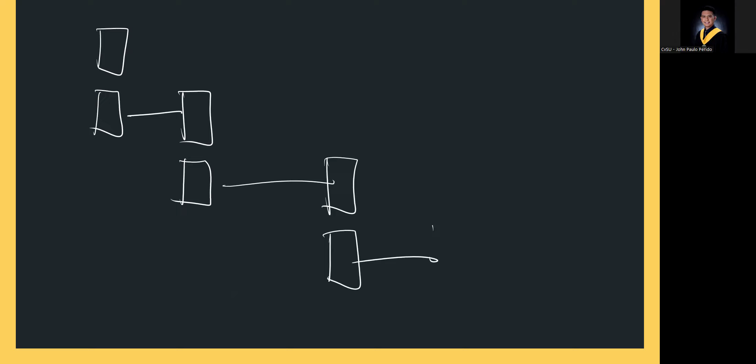So, ito yung first reduction, second reduction, third reduction, and then ito yung ground wheel. First, second, third, ito yung ground wheel. So, si N1, D1, N2, D2, N3, T3, then N4, T4, N5, T5, and then N6, T6, and then N7, D7 speed. So, i-fill out natin yan.

So, si N1 tsaka si D1 is 3,000 RPM and 10 cm. So, 3,000 RPM. Ito naman is 10 cm. Si N2 wala, D2 missing, N3 missing, N4 missing. T3, T4, 25, and 100. So, this is 25T. This is 100T. T5, T6 meron tayo, 33 and 110. 33T to 110T. So, 50 cm to. And then, ito naman, 3 kph.

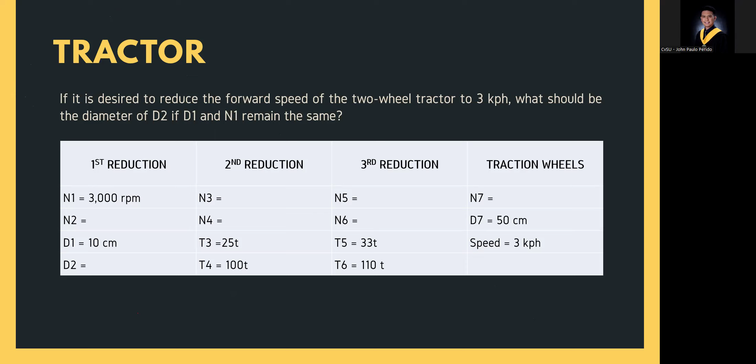Okay? So, ang gusto natin is mahanap yung imemesh natin kay D2 if D1 and N1 remain the same. So, D1 at N1 remain the same, D2 yung hinahanap. Okay? So, ang gagawin natin pag-solve ay mula dito papunta dito sa part na to. Since given yung speed, convert natin yung speed, makukuha natin yung N7 using V is equal to pi DN.

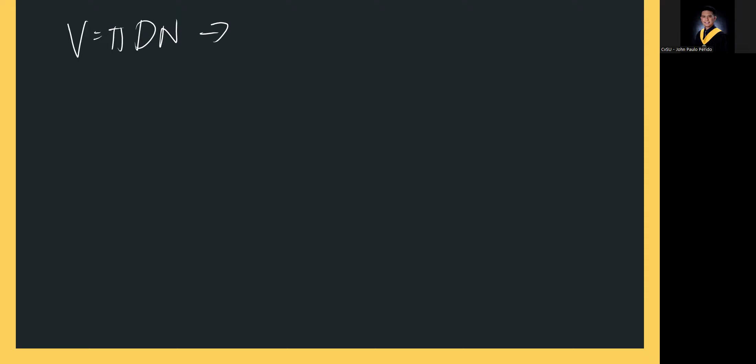Okay? So, V is equal to 3 kilometers per hour. Convert natin. 1 km, 1,000 meter times 1 hour, 60 minutes. Equal na to. So, this is equal to pi times 0.5 meter, 50 cm or 0.5 meter, times N. Okay? So, yung N or N7.

So, pag hinanap natin ang value ng N7, ang lalabas sa atin dito ay ilan? So, N7 is 31.83098862 RPM. Yan. So, sulat natin dito, 31.83098862 RPM. So, connected si N7 to N6 via shaft. So, etong shaft na to. So, ibig sabihin, same lang to, 31.83098862 RPM. So, again, pagka shaft, same lang yung speed.

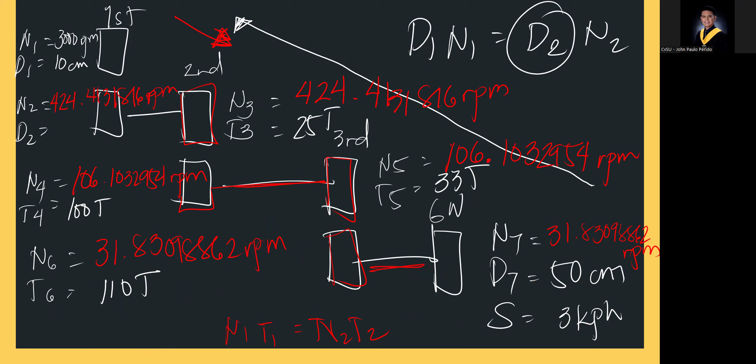Pero dun sa sinabi ko, use diameter less than 70.685834 to achieve yung 3 kph na gusto natin. Okay? So, for this particular problem, pwede kayong gumamit ng, let's say, 70 cm na D2 para ma-achieve pa rin natin yung 3 kph. More than 3 kph yung mapo-produce nyo dyan. Pero kung gagamitin nyo yung 71, less than 3 kph na yung ma-achieve nyo.

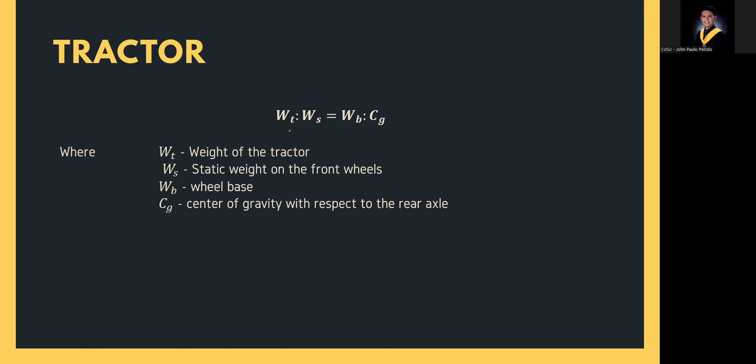So, next, tractor weight. Okay? So, proportion lang naman to. Weight of the tractor is to static weight of the tractor in the front wheel is equal to wheelbase is to center of gravity with respect to the rear axle. So, what is the wheelbase of a tractor weighing 7,800 pounds if the static weight on the front wheel is 1,500 pounds? Assume that the location of the center of gravity longitudinally with respect to the rear axle is 32.5 inches. Okay? So, ang sabi, tractor weight is to static weight.

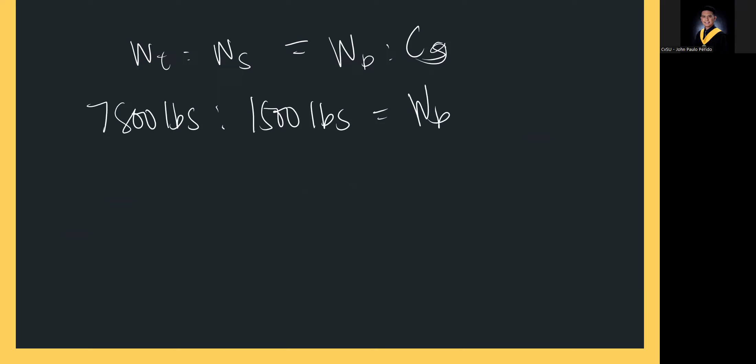So, tractor weight is to static weight is equal to wheelbase to center of gravity. So, ang tractor weight natin, 7,800 pounds, ang static weight natin is 1,500 pounds, is equal to wheelbase natin, yun yung hinahanap, and then yung center of gravity is 32.5 inches. Okay? So, pag sinolve natin to, makukuha natin sagot: wheelbase is equal to 169 inches. So, that's all.